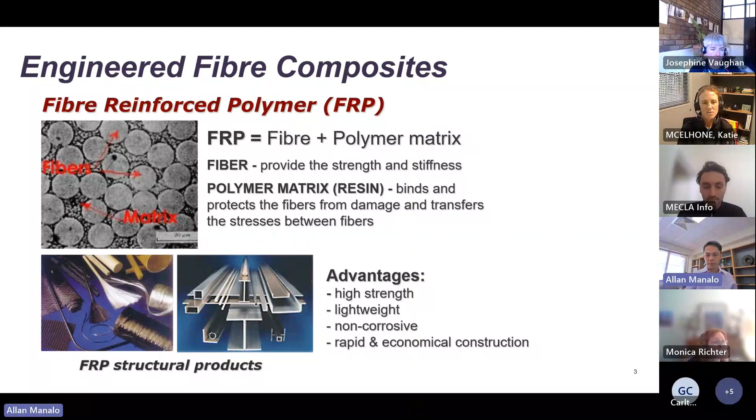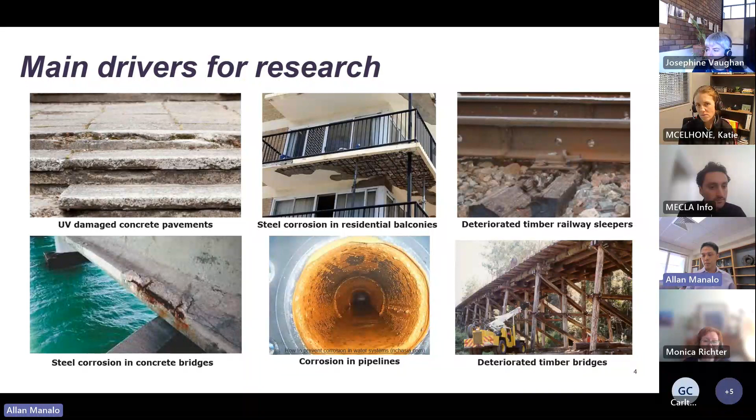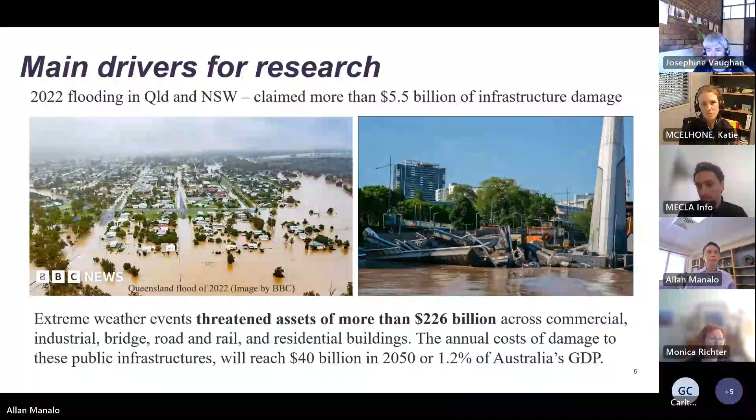In the works that we are doing at UniSQ, obviously we are focusing on engineered fiber composites, but we are also working on some cementitious or concrete materials, working with asset owners and industries, as well as doing research and development in a number of areas, especially in new construction and also repair of critical infrastructure. Some of our projects focus on the following.

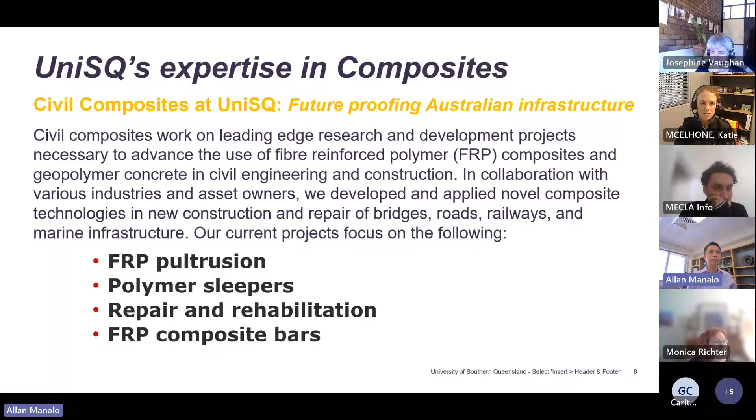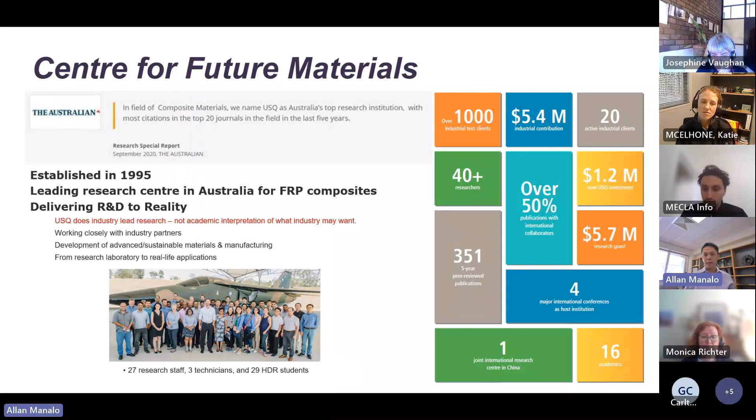So we have over 1,000 industrial test clients, collaborating with them in delivering our research, but also providing testing of the products that they have developed or are developing.

So UniSQ, in collaboration with two companies, Wagners Composite Fibre Technologies as well as Loc Composites, has developed Australia's first FRP bridge. This is in response to the deteriorating timber bridges in a number of networks in Queensland. As I mentioned, a number of these timber bridges, especially in regional parts of Australia or in Queensland, are deteriorating. But it's now very difficult to obtain those large cross-sections of hardwood timber.

So with composites, we can engineer them to behave like timber, and that is very important, especially when we are doing maintenance of this aging infrastructure or asset, where if you're going to replace only one of those damaged or aged timbers, then you need the replacement material to have a stiffness similar to that of timber, so that when you replace that damaged part, you'll have good distribution or redistribution of forces amongst them.

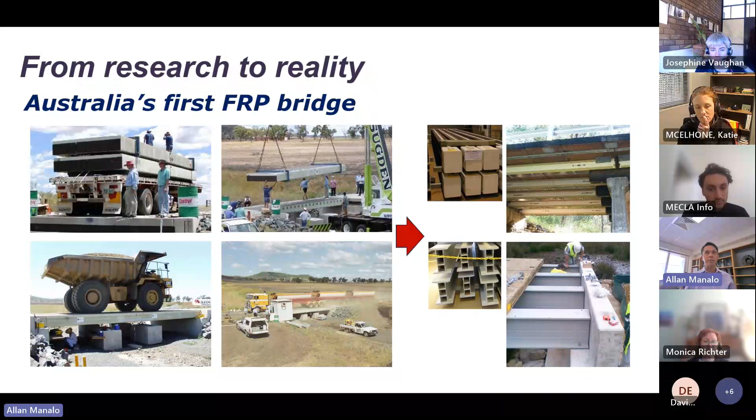So from that research, we are continuously collaborating with Wagners, developing new profiles for their products. We have an advanced manufacturing facility also at UniSQ, a pultrusion machine, and filament winding as well. These are the most common types of manufacturing process in producing these pultruded profiles. But in addition to manufacturing, we do a lot of experimental testing and numerical modeling as well to really come up with an optimized design.

So these products are now being used in a number of construction engineering applications: for cross arms in electrical poles, for electrical poles as well, for pedestrian bridges, especially in aggressive environments, and also bridge infrastructure in marine or aggressive environments.

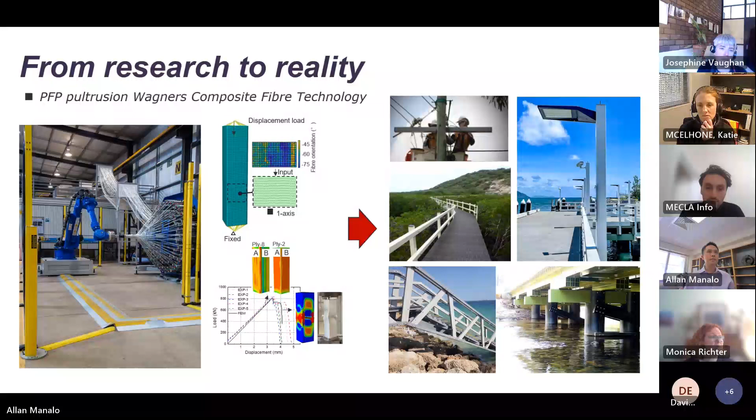We have worked with Austrak. Austrak is the number one supplier of pre-stressed concrete sleepers, but because they have identified the significant market for a composite alternative, we just completed a CRC-P funded project with them to develop composite railway sleepers. Railway sleepers are the horizontal beams that you will see in a railway network that support the rails.

And similar to what I mentioned, in the rail network of Queensland Rail, they are now having difficulties procuring the high quality hardwood which they traditionally use in supporting rails. So in collaboration with Austrak, we have developed the fiber composite railway sleepers.

And in that development, we have used fiber composites in areas where the stresses are high because of their high strength, but we have also used some waste materials like fly ash, crumb rubber, and some waste plastics in areas where the stresses are low, so that we have a balance of good performance for the technology, while utilizing low cost materials to come up with a cost competitive product.

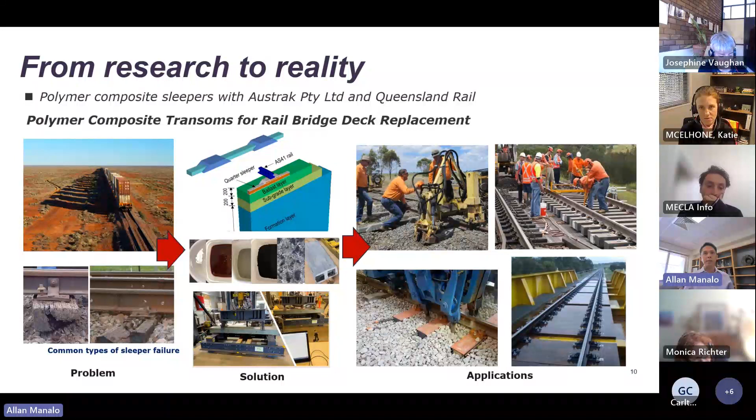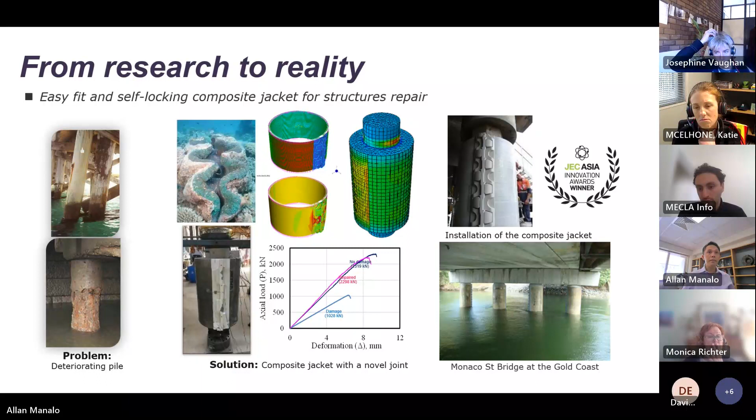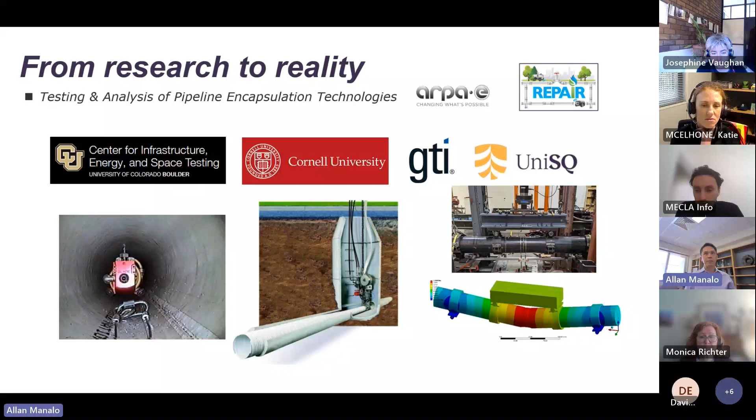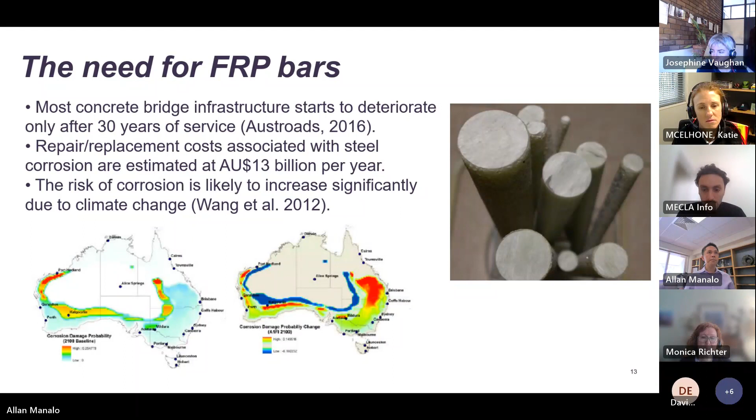So obviously we do a lot of research and development to demonstrate to our engineers and asset owners the benefits as well as the performance of concrete structures when they are reinforced with GFRP bars. And the experience and knowledge that we have generated has helped us in demonstrating to a number of asset owners the benefits of using non-corrosive and high-strength reinforcement in a number of

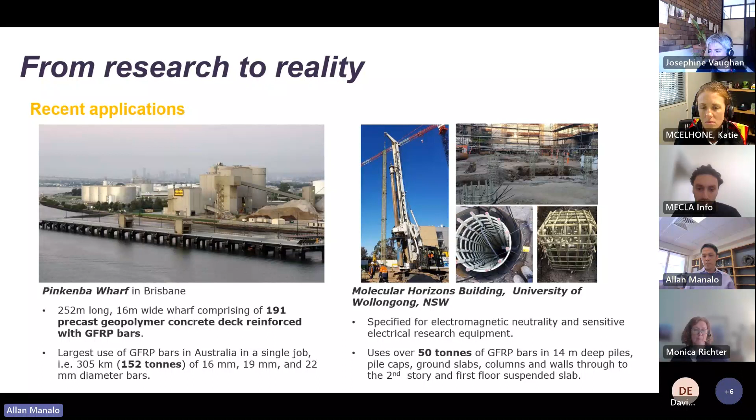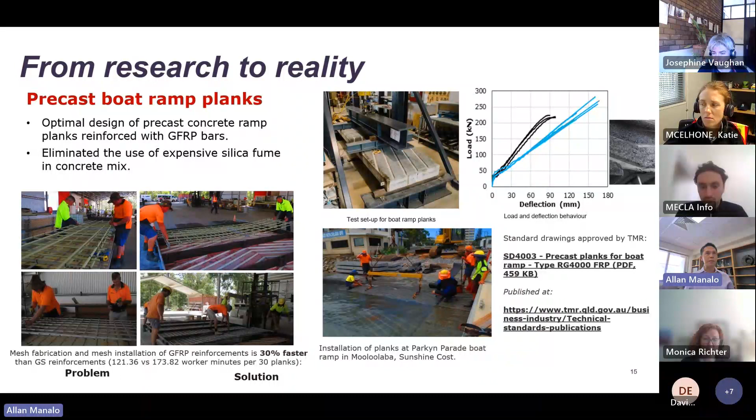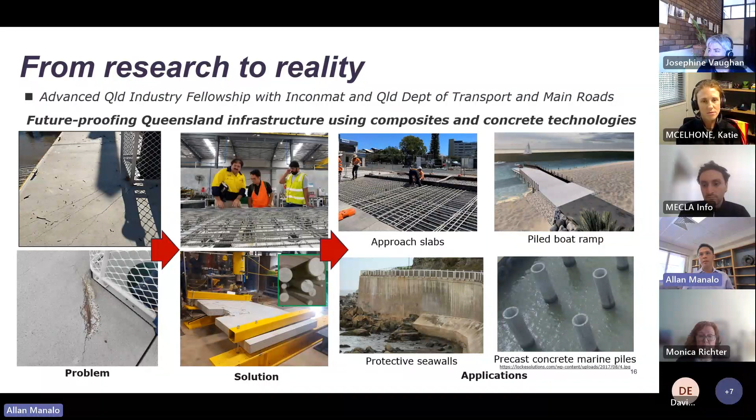We are also working with the Gold Coast and the Sunshine Coast City Councils in developing protective seawalls using composites. And again, with Queensland Transport and Main Roads, looking at precast concrete marine piles reinforced with GFRP bars, working with a number of industry partners: Inconmat based in South Australia, Humes Holcim based in Queensland, Graphene Manufacturing Group, and Zero Waste Matters.

We were successful in a project funded by CRC-P on advanced reinforcing materials to increase the longevity of Australian infrastructure. As part of this work, we're going to use bio-epoxy resin systems as the binder for glass fibers to make the product more sustainable and lower carbon emissions by using more bio-based materials, but also bringing circularity where we're going to use waste glass as the sand coating on the surface of the FRP bars.

Sand coating is important so that you can promote the adhesion between your surrounding concrete and reinforcement. But at the same time, you're also utilizing waste plastics in developing clips to tie together this FRP reinforcement.

And working with Transport and Main Roads, looking at how we can use this reinforcement in a number of critical infrastructure. So we're looking at ballastless track reinforced with GFRP bars, working closely with ARTC, the Australian Rail Track Corporation. Probably you're well aware of the Inland Rail that will connect Brisbane to Melbourne, and there's a 6.1 kilometer tunnel that will be built as part of that project, just in the backyard of UniSQ, near the Toowoomba bypass.

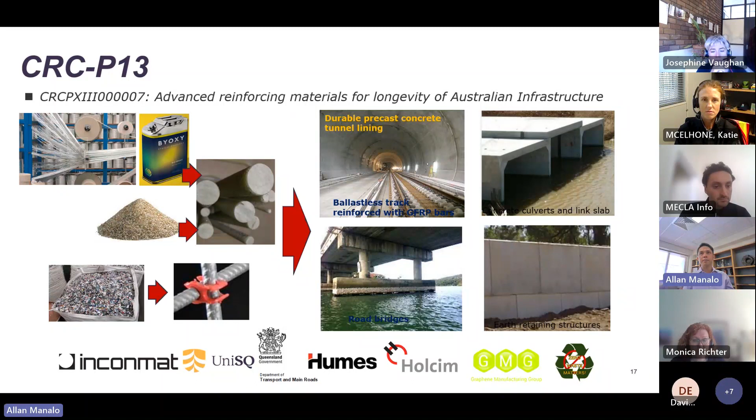In addition to those developments, UniSQ is also actively involved in developing standards and specifications for composite rebars. We are now in the stage of public commenting, and I would imagine that a number of organizations involved in MECLA have provided comments to these draft standards for FRP bars.

But in parallel, we have worked with Transport for New South Wales as well as Queensland Transport and Main Roads in developing a technical guide as well as a material specification for them to be able to start specifying the use of these reinforcing materials in their infrastructure.

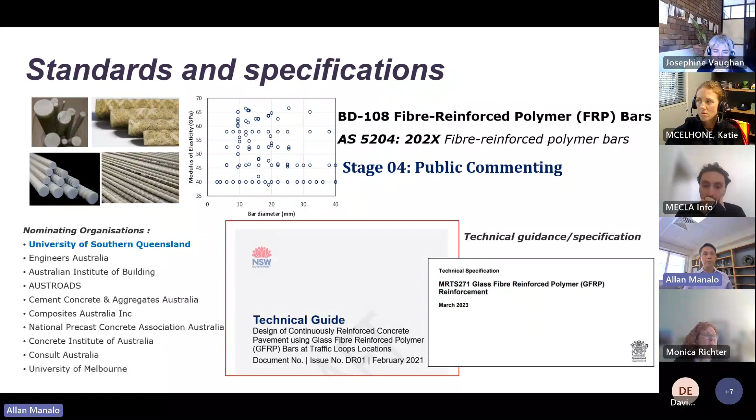We are also providing education and training. At UniSQ, we have an online course for practicing engineers as well as senior engineering students on the mechanics and technology of fiber composites. And every now and then, we deliver technology workshops to practicing Australian engineers to provide them with the knowledge necessary to design concrete structures reinforced with GFRP bars. And we're working with one of our industry partners in developing design software for concrete structures reinforced with FRP bars.

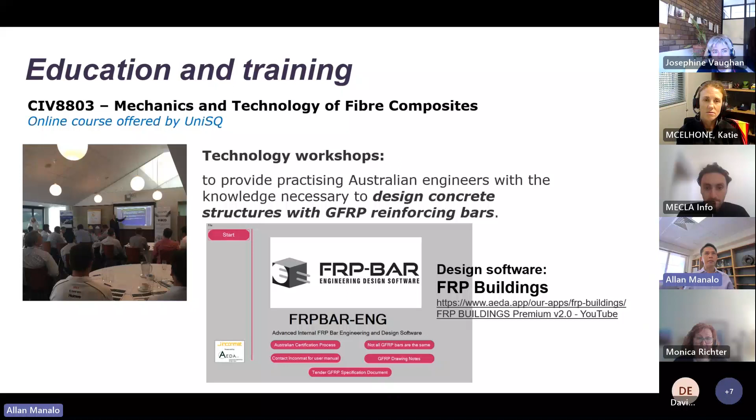So really, these are the activities that I believe UniSQ will benefit from being a member of MECLA, working with organizations who are also members of this working group in disseminating, getting that feedback and sharing their knowledge on this new type of technology so that we can improve it further.

So this is just to summarize the activities that we are working on at UniSQ with our industry partners in creating a Climate Resilient Infrastructure and Adaptive Technologies research hub. We are focusing on net zero infrastructure, also working on carbon neutral manufacturing, and extensively on carbon capture construction and building materials to create that climate resilient infrastructure.

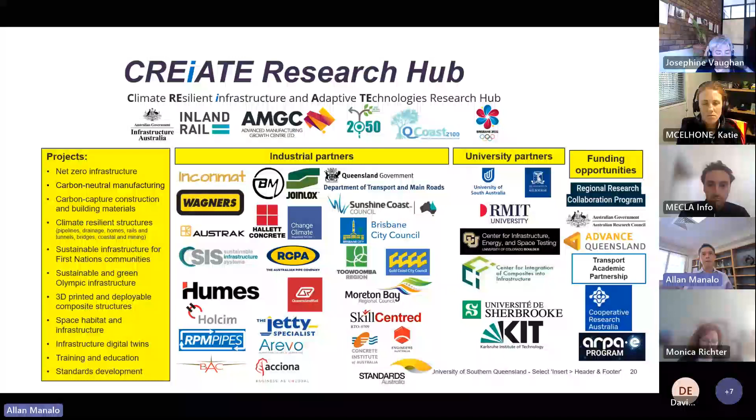So these are some of the organizations that we hope will participate during the event that MECLA is planning to organize in Brisbane next month.